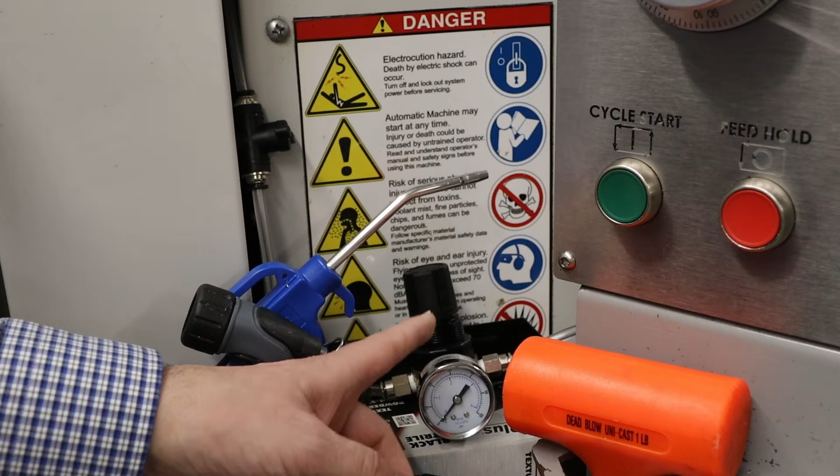I recently decided I wanted to do some organizing here. This is a low pressure regulator, it goes from 0 to 25 psi, that I use for the air knife on the camera inside the enclosure. And this is the shut-off valve, so I can turn it on and off. And these are just sitting there.

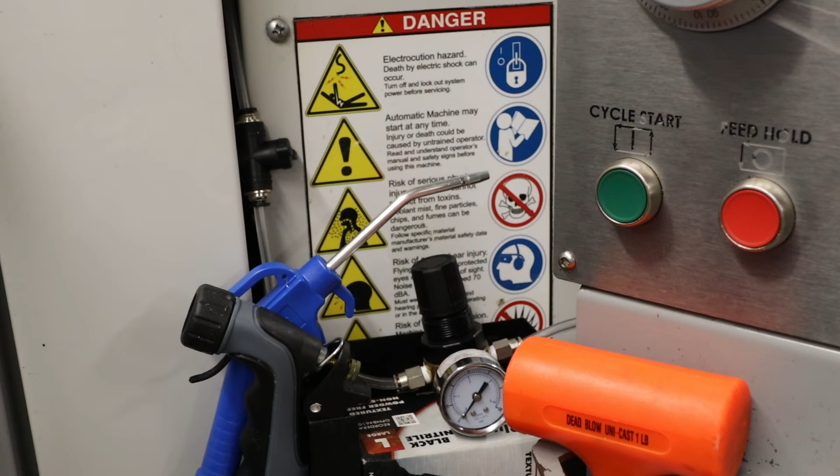It occurred to me recently that I can create a 3D printed part with some magnets, at least I think I can, that will sit here and organize this nicely. So I'm going to head to the computer and start working on that, and we'll come back when I have something ready.

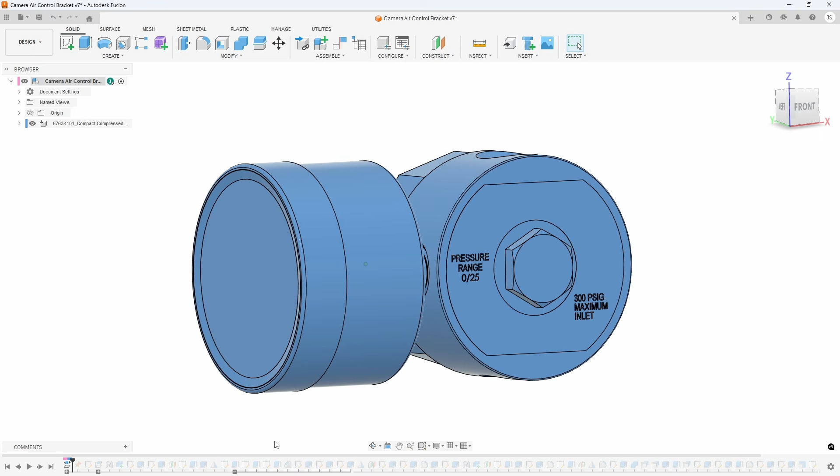Typically when I start with something like this, I want to start with the parts and then figure out what the placement is going to be between the different parts. Here you can see I have the regulator that I imported from McMaster, and it even has the labels on the front that says the pressure range is 0 to 25 psi, which is the exact one that I have. The regulator itself did not come with a nut to hold this in place, but I found there is a nut on McMaster Carr, so I downloaded that nut as well. This will give me an idea of how thick the mounting can be with the nut fully engaged with all the threads.

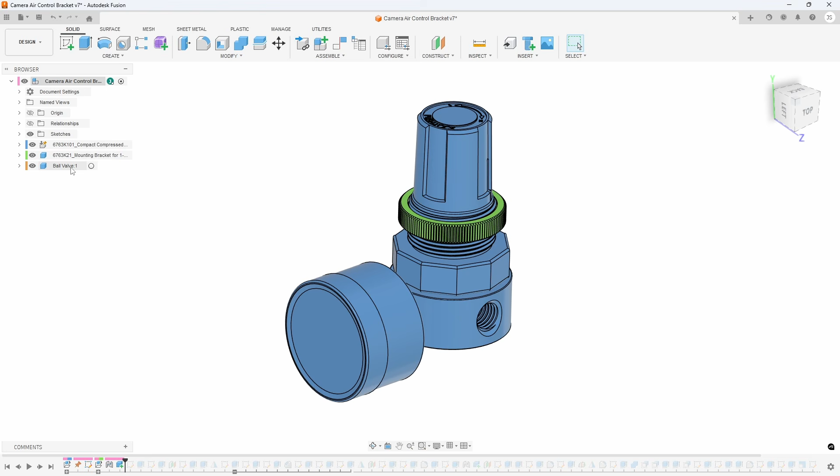Next, I started to model the valve itself, and I'm going to isolate this, and I'm going to fast forward. I went through many more steps and added a lot more detail than I really needed.

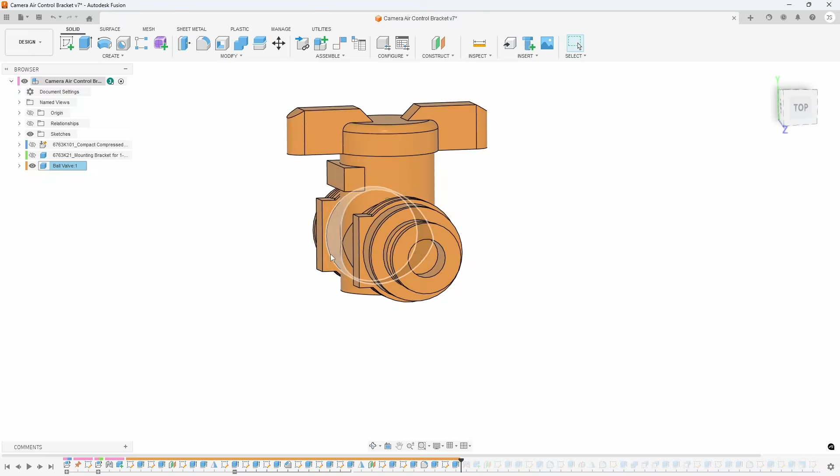So if we look at the final design that I implemented, the goal is to be able to subtract this from a section of the mount to effectively create a cavity that will hold this in place. The cavity, I want it to come up to about here, covering some of this distance. To fit in there, it's important that I model from about here to about there. It's not important that I model these areas here. In fact, it probably makes it a little bit harder later on if I did model those. But I modeled them anyway.

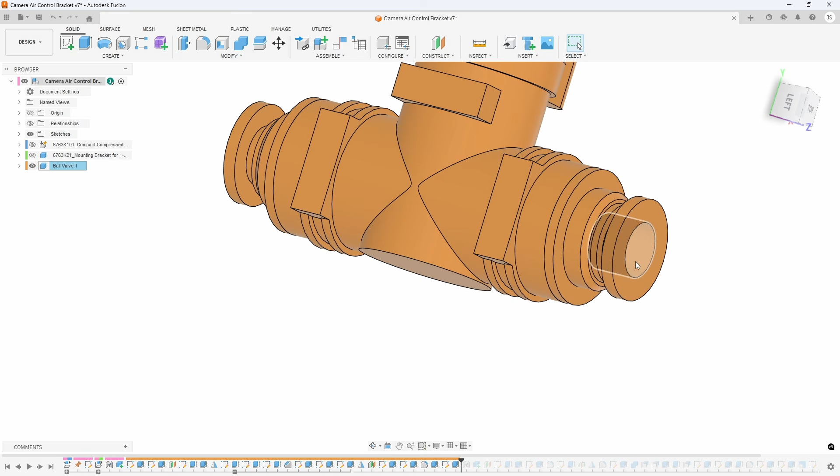I also modeled the hole here, the push valves, the push to connect fittings, and the actual handle that you turn, etc. Most of these are things that I really didn't need to model. So I'm going to zoom out a little bit because the next thing I did is to move this over, and I should un-isolate this so you can see what I'm doing.

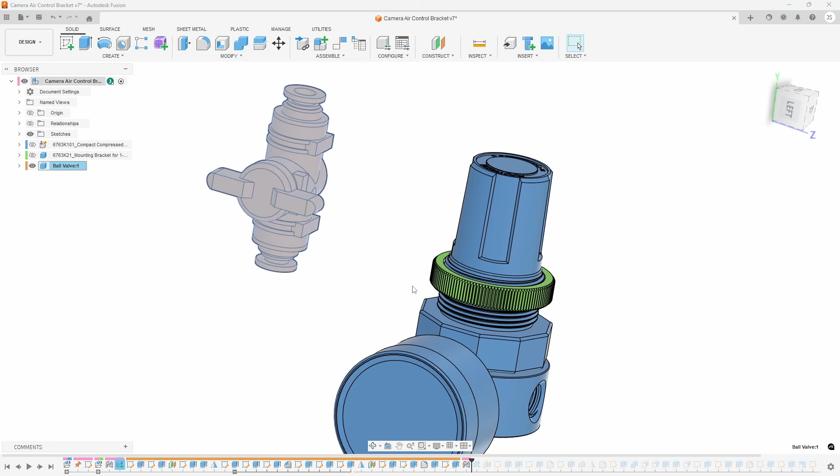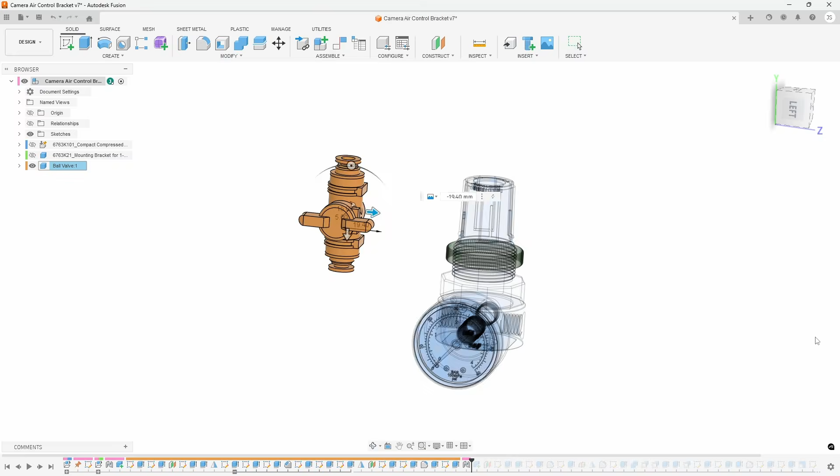I did the positioning using a joint, and here you'll see that I set the X offset, and I set basically all of the offsets to position this roughly where I wanted it to be. I'll undo that. The idea is that there are some push to connect fittings here that come out, and the hose is going to come out and then have to go up here.

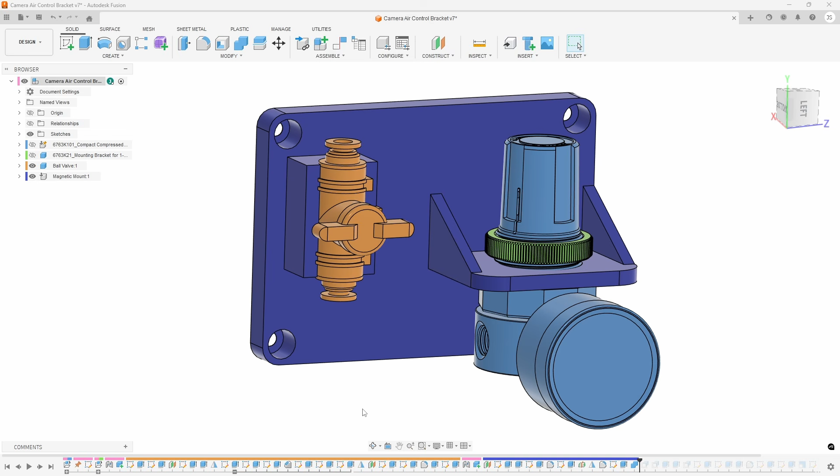I jumped forward to get to the interesting part, which is where I've basically modeled this bracket. Now what I want to do is create a cavity here. So if I hide the ball valve, you can see I have the cavity. This shows the ridge in between these two things, which really isn't something I needed to model because it's not something I really care about. It's going to be constrained enough just by having these empty slots here.

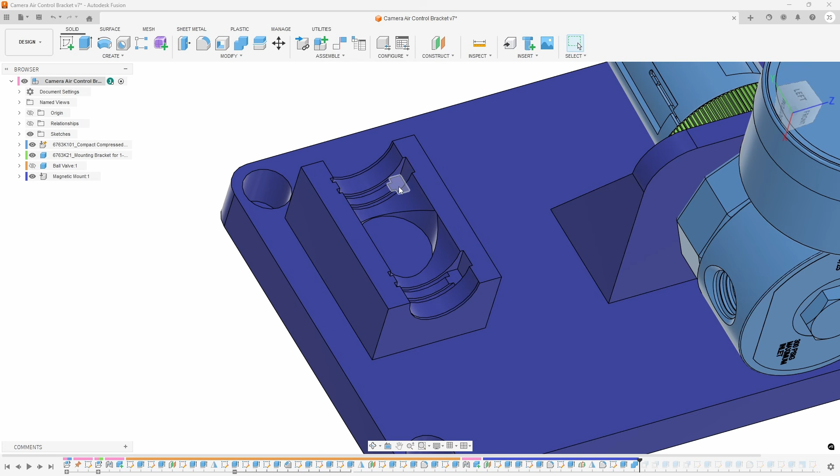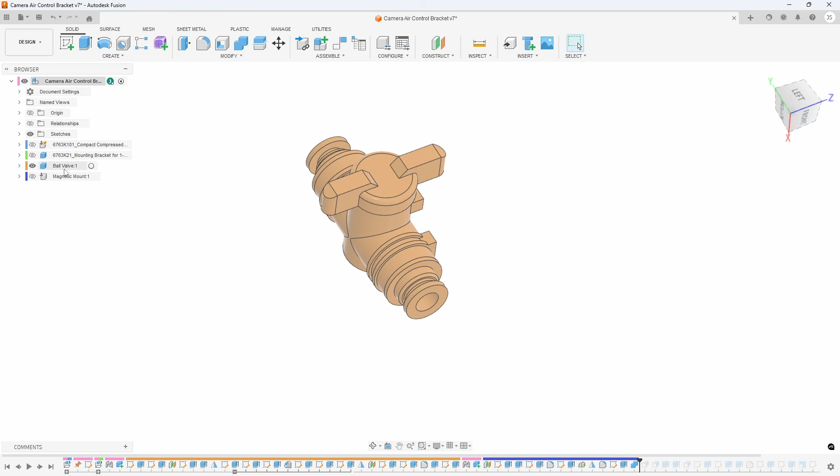Now, if I just left it this way, the fit would probably be too tight. So I usually like to have the faces offset a little bit. There are a couple of different ways I could have done that. One, if I turn this back on, is to change the size of this. Basically, if I change the size in this direction as well as this direction here, that would make the opening larger. But I also want to move these walls out a little bit so it's not as tight a fit there either.

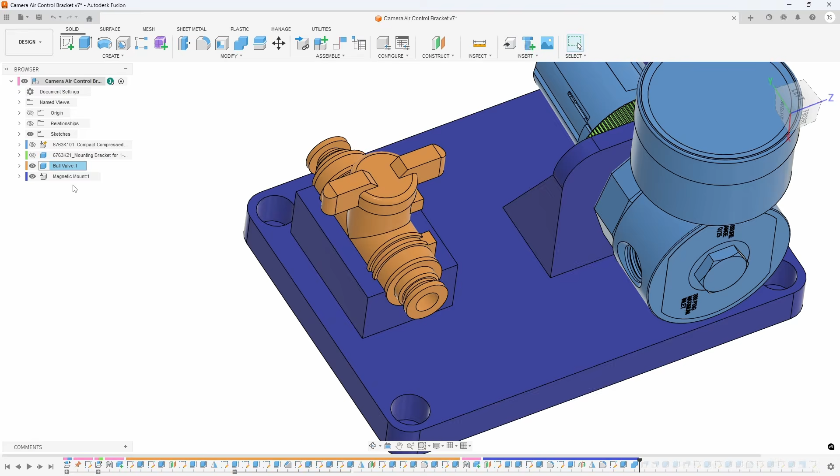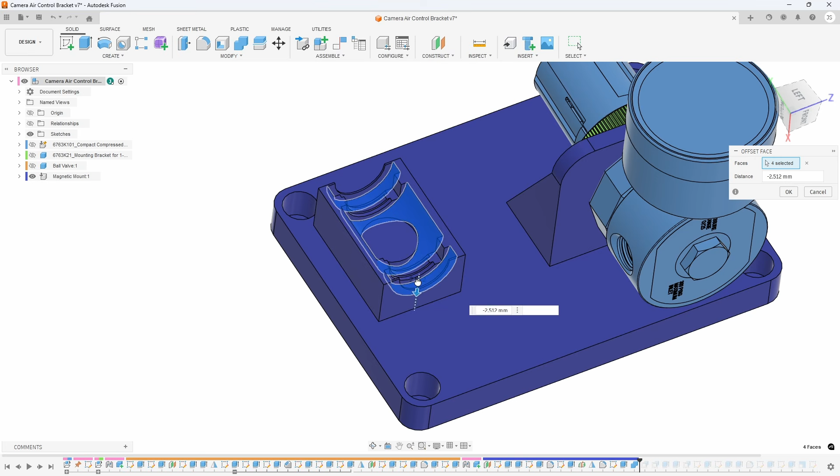So the approach I'm using instead is the offset face. If I click here, for example, as well as there, by holding down the control key, and there, then I can offset this by as much as I want. And I'm going to use minus 0.3. So that has made all of those surfaces a little bit looser than before by minus 0.3.

Now I've already done that, so that's what these operations are down here. This is the first one, you can see it opened up this area. The next one is what we just did, where I'm opening all of these walls here. And then you can see I'm getting rid of these here - if you watch right there as I click forward, you can see that ridge goes away. Then I moved these walls in and out, which gives me a looser fitting.

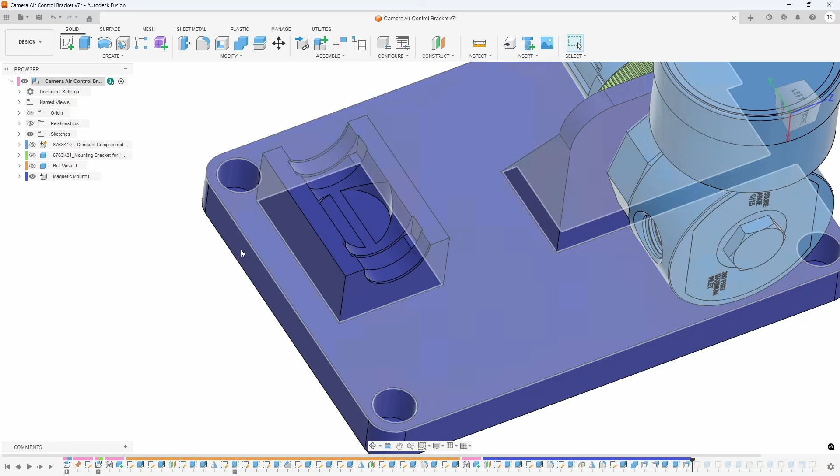And then the last thing I did, well, I did quite a few more things, is to add some slots for the zip ties. So the zip ties will go through here and that will hold the ball valve in place.

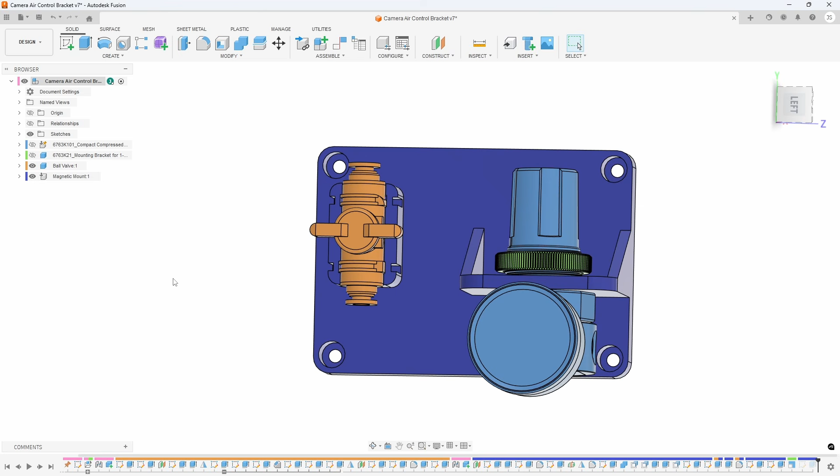So this is the completed part. There are a couple things I should also mention. These are slots for 10 millimeter by 10 millimeter magnets, and I showed this in a previous video. I have a hole here in the bottom so that if for some reason I want to recover the magnets because this doesn't work very well and I want to reprint it, I can just push the magnets out from the bottom.

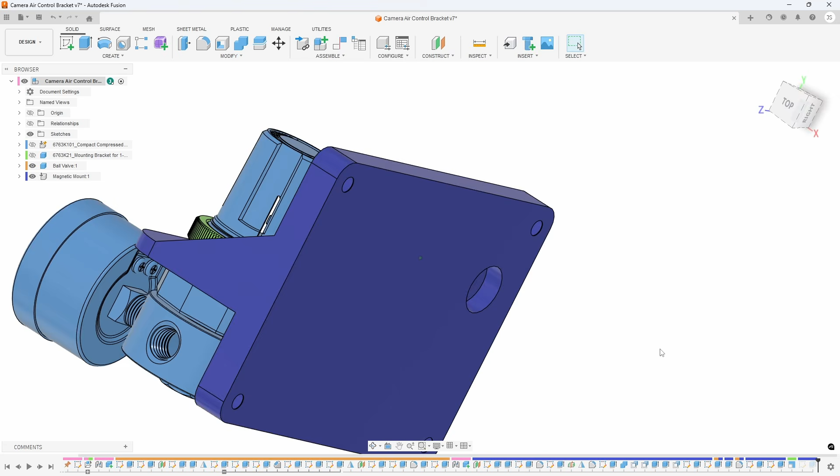This bottom area is only 0.2 millimeters thick, which is the layer height that I'm using. So I just have one 3D printed layer between the magnet and the metal, and that's not much of a distance, so the magnet is still quite performant.

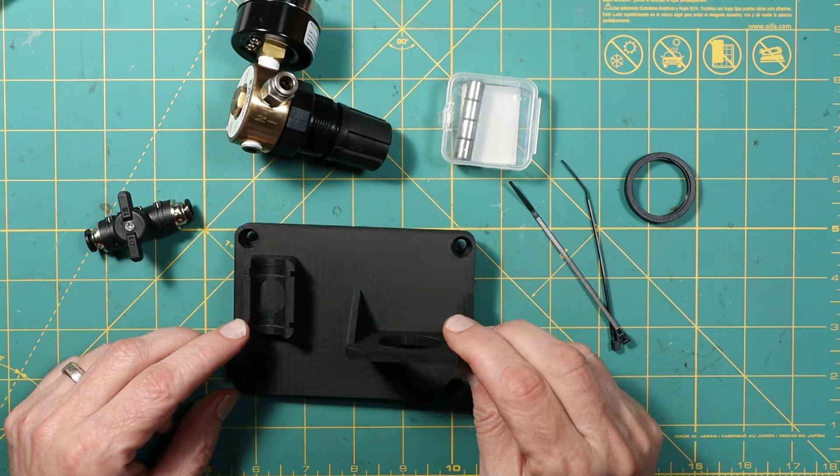Okay, here's everything I need to assemble this. These are the magnets that I mentioned. They're 10 millimeters in diameter and 10 millimeters long. So I will open these up. This is not a full pack, this is what I have left in this pack, which is just the right amount.

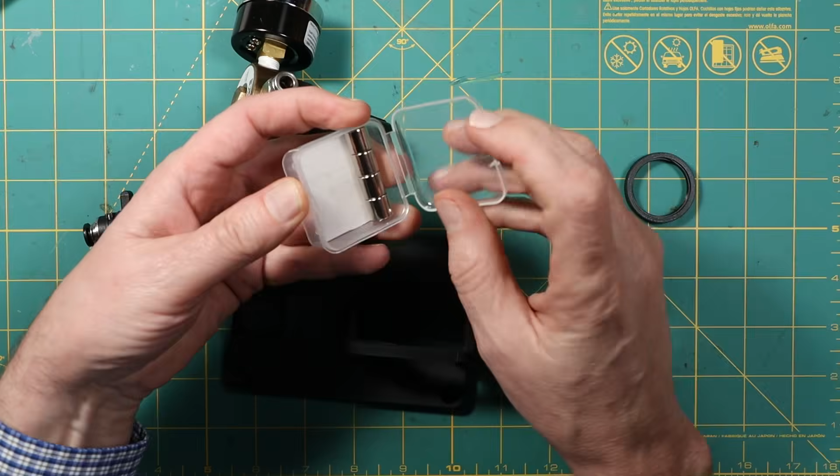I'm going to grab one of these at a time and then push it in. It's somewhat tight, which is fine. As you can see, I can push it in mostly with my fingers. That one was a little bit tighter. If I need to push it in a little bit more, I can easily do that though.

Okay, that one seems like it's a little bit proud. I'll probably use a tool later on to push these in a little bit more. Next time I think I might print these so that they're not quite so tight, because this last one definitely seems too tight. I'll work on that, and hopefully it won't take too much effort before I can get that in there.

So I have this one trick. I'm going to use this to give me a little bit more force, so you can see that starting in. Yeah, I'm definitely going to have to get some pliers or something else to get that in all the way.

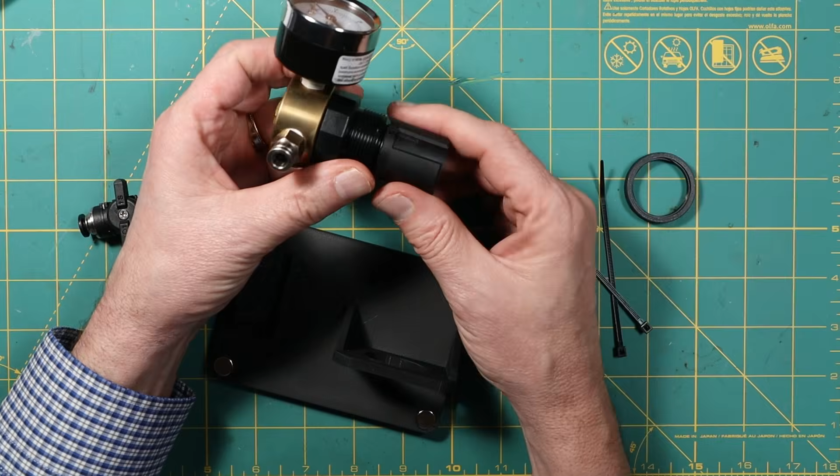But until we do that, the next thing is I need to pull this cap off. It just takes a little bit of fiddling. I don't know if there's a trick to it. I'm going to come back once I have it off. Of course, I just had to get better leverage on it.

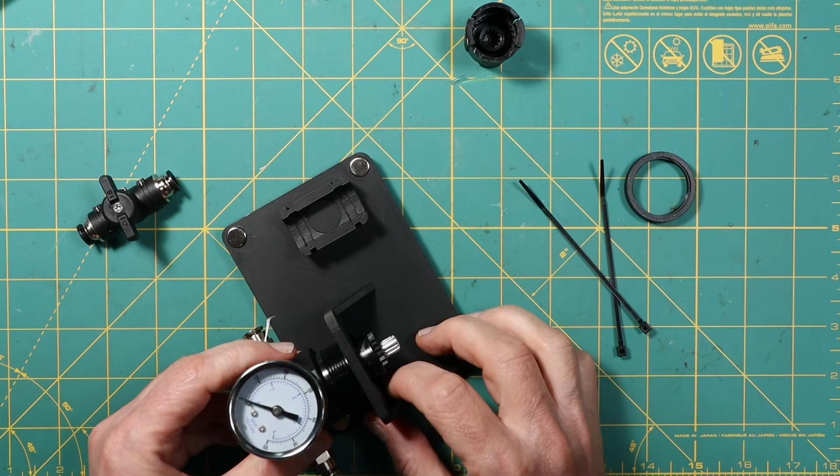Now that it's off, I can use this nut. Now this is, as you can probably tell by the surface, just a 3D printed version. I increased the size of it by about 0.3 millimeters in the X and Y direction, but kept the Z the same so that I wouldn't affect the thread pitch. And the reason I 3D printed this, by the way, is not because this part was expensive. It's actually because the shipping was really expensive. So the part itself is quite affordable, but this will be fine for now.

The next thing I want to do is mount this in place, and it's a little hard to tell, but on this side there is a rectangular space for the rectangular part over here. So this actually fits better in this way. You can see it's not loose, it's a nice fit, than it does in this way. It kind of fits in this way, but this is the way it's meant to be put in there.

All right, then I have the zip ties that will hold it firmly in place. And then I have this nice tool here for, let me do it this way. Basically, it pulls it tight and then cuts it so that I don't have to cut it later on. So it's a really nice tool.

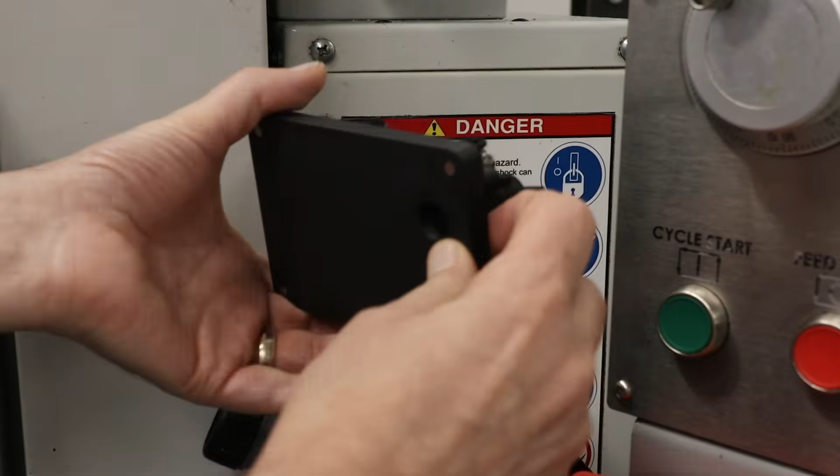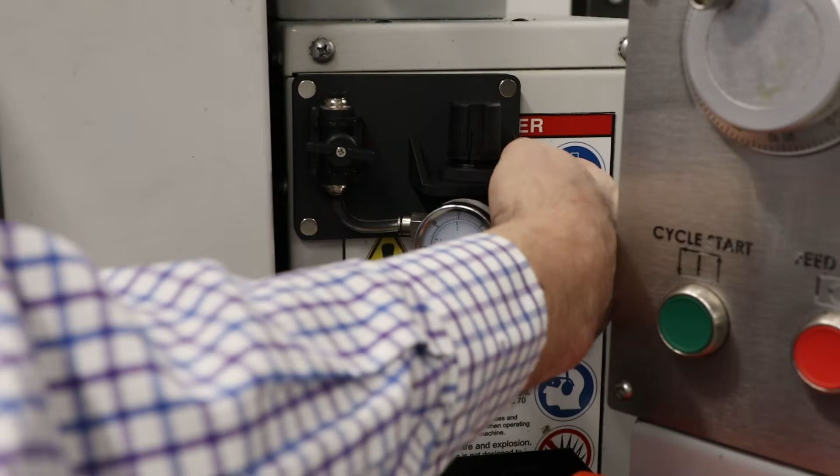Now, one of the things I did is I put a depression here that will fit over this screw so that I can have this nicely lined up there. And as you can see, once I put it here, I can turn this quite nicely.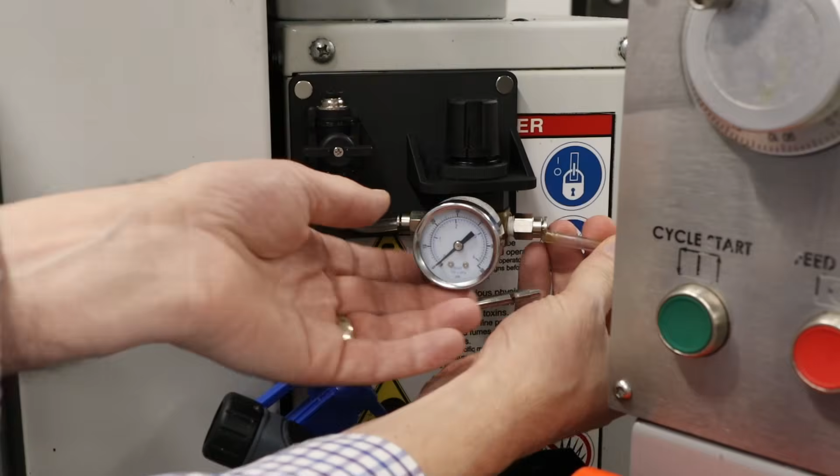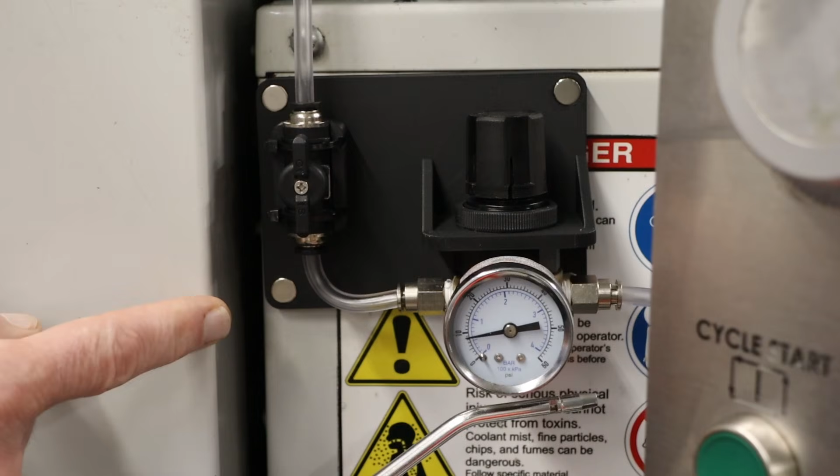So then the next thing to do is to hook up the air lines. I have one air line coming in here, let me rotate that, and then the other air line comes down here. So I've turned on the air supply, so now if I rotate this, you can see I can easily adjust the pressure. Here I'm setting it to 10 psi, which is what I normally use for my air blade. And then I can just open this, and you may be able to hear the sound of the air escaping, and that's coming out of the air blade. So that is much neater than I had before.

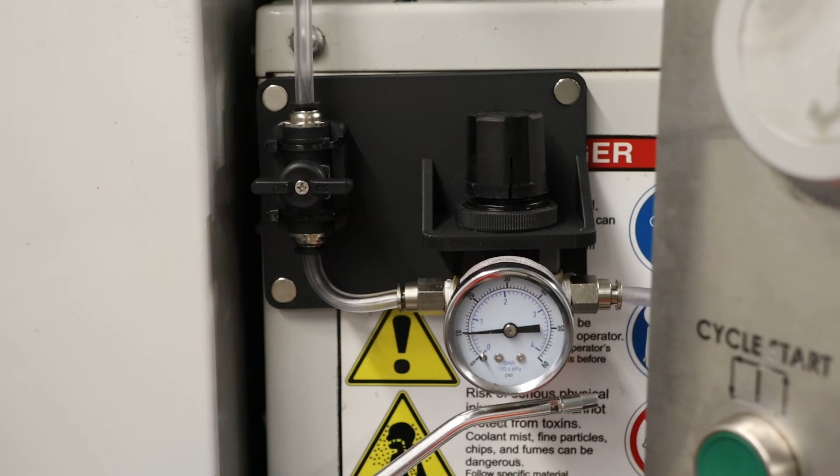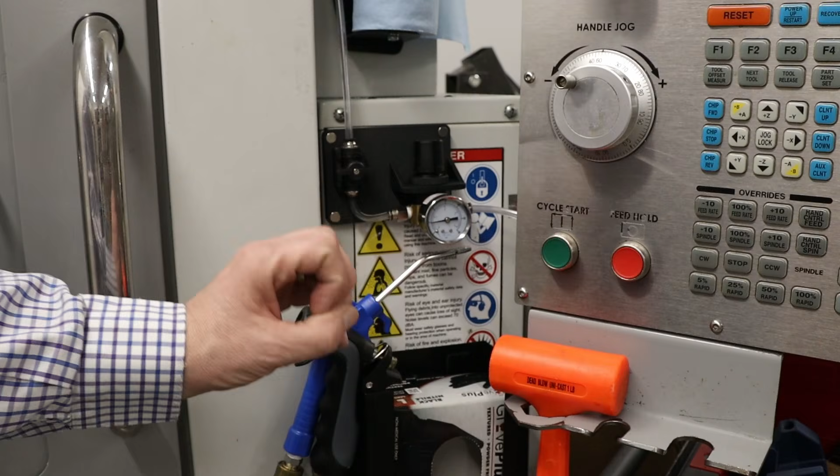I'm going to zoom you out and give you an idea of what I'm going to work on next. I'm really happy with how this has turned out, but now I need to do something about this organization, which will be in the next video. Thanks for watching, and I'll see you next time.